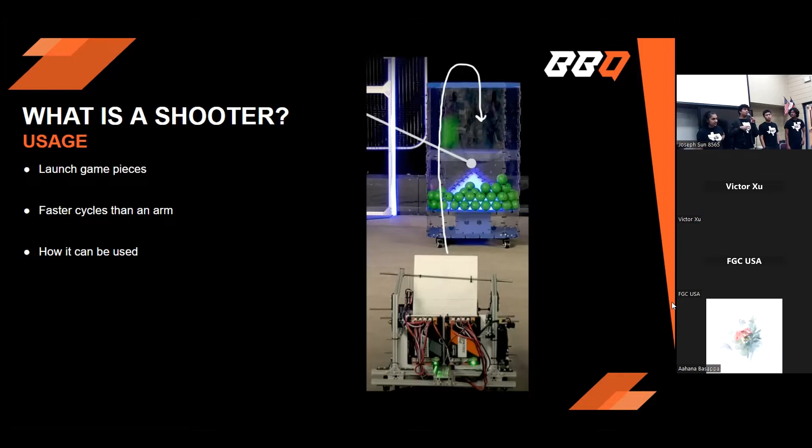Many FIRST games have been built around this subsystem, such as 2020 Infinite Recharge and 2021 Ultimate Goal for FTC and FRC, and more recently this year the 2023 FGC game, where you can use a shooter to separate the hydrogen and oxygen nodes into their separate containers.

Enter the design process. We have to remember that iteration is key to successful design. We have to factor in three things before making a design. One, how compression can change both speed and path of the cargo. Two, how different materials and wheel sizes react to the cargo. And three, how cargo reacts to each shooter differently. After factoring in all three things, we are set to make a successful design.

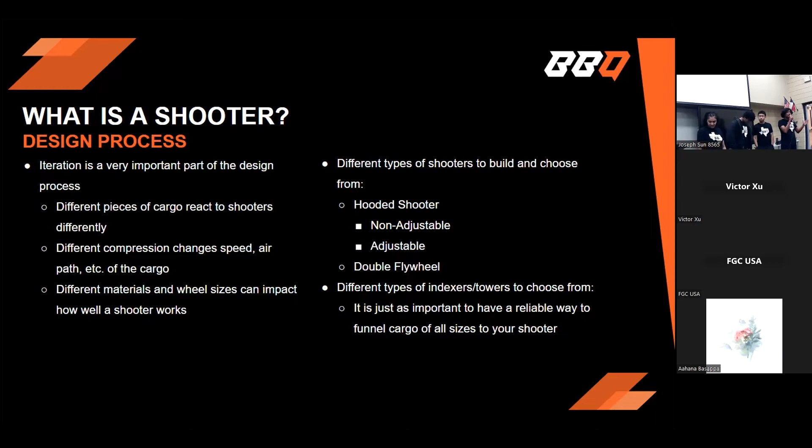Remember, it is just as important to make a successful indexer as it is to have a shooter in the first place. When we say indexer, we mean what funnels in your cargo, typically the middleman between your intake and your shooter. Next is what actually makes up a shooter. Our shooter has to be A, reliable so it won't break down mid-match, B, accurate enough to maximize points, and C, consistent so it scores every single time. Mechanically, our shooter is made up of a hood and flywheels.

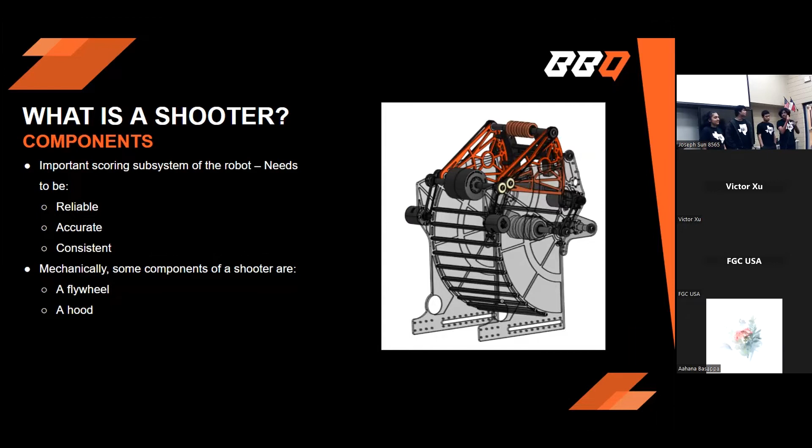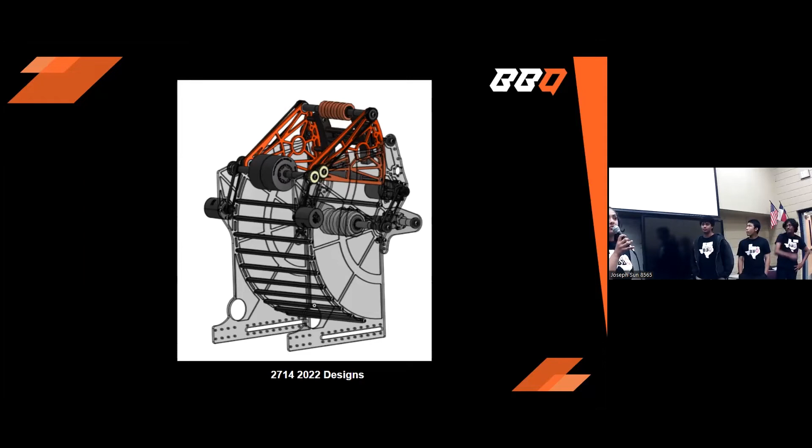Okay, great. So now that we know the design process for a shooter and the components needed to make one, let's talk about a step-by-step process of how to actually design one. These are past designs from BBQ that have been used in old FRC games like Rapid React. So let's start off with the flywheel.

The flywheel is basically what's going to be powering your shooter, what's going to be shooting your cargo. It's essentially a really simple system. You're probably going to use a heavier type wheel, larger wheels, and you can have a wheel or a set of wheels on a shaft. You always want to make sure it's spaced out in the middle, because if it's too much to the left or too much to the right, your balls will skew their path in the air.

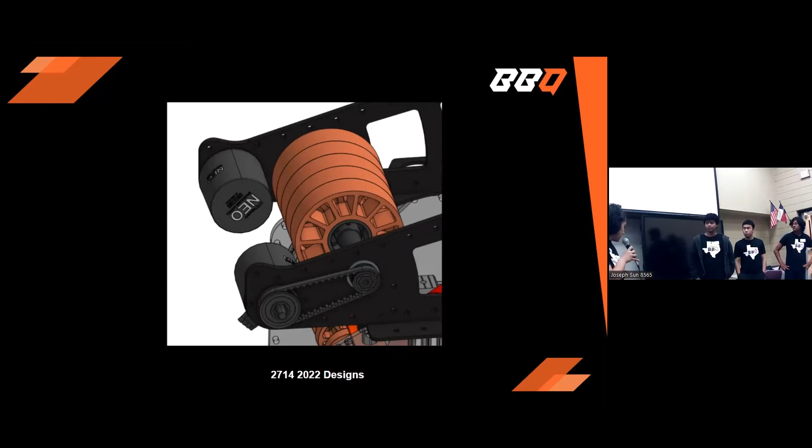Next, to power it, you're going to need 1 to 2 motors and a pulley belt system. For this gearing, you want to have the larger pulley on the motor, so that your flywheel is going to be faster rather than having more torque, because the faster your flywheel is, the better the shots you're going to get and the farther they're going to go. So next is the hood.

This is a non-adjustable hood from the Rapid React game, and these are one of the simplest hoods to make. It's essentially like a backboard for your cargo. Imagine a backboard for basketball: it helps the ball go in, but it doesn't shoot it itself. These can be made out of anything. This one was 3D printed, but you can use cardboard, metal, anything really. The most important part is that the cargo can roll up it and that it is completely stable when you're shooting, because if it moves around, your shots are not going to go to the right place.

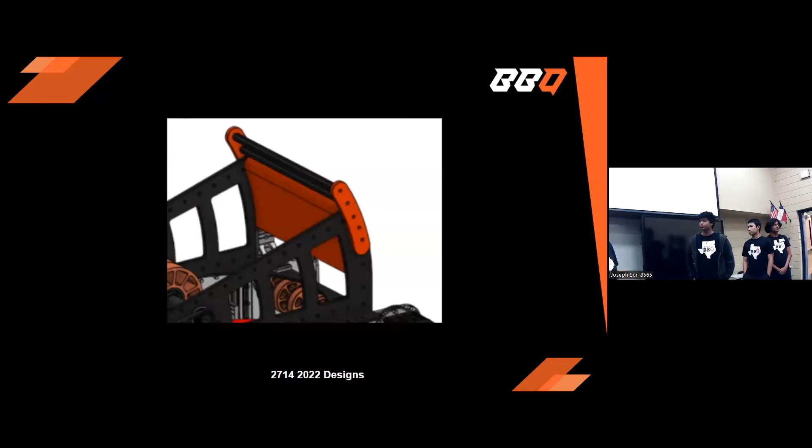There are two types of hoods: non-adjustable hoods and adjustable hoods. This non-adjustable one is the simpler one to design. And this is an adjustable hood. An adjustable hood is a little bit more difficult to design and program, but I'm going to lead you through how to design it.

Basically, you're going to need a rack and pinion. The rack is attached to the shooter hood itself, and that moves the shooter hood up and down. The pinions are on a shaft connected to the shooter structure. So when the pinions move either left or right, it's going to move the hood up and down.

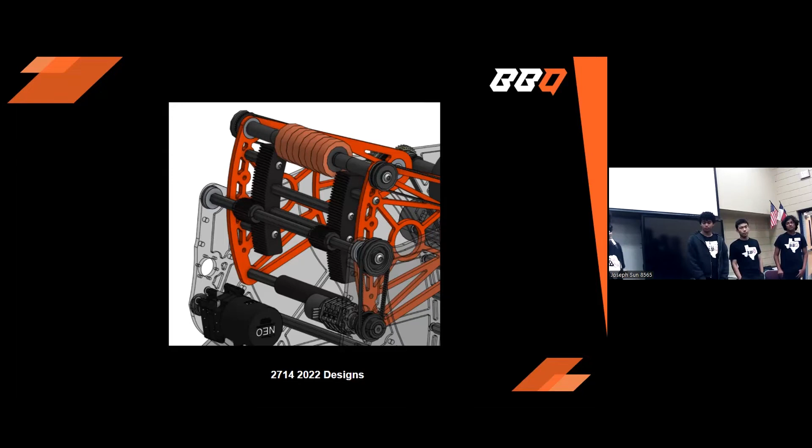To power this, you're going to need a motor and the same pulley belt system. However, for this one, you want the gearing so that the smaller pulley is on the motor rather than the larger pulley. This gives you more torque rather than more speed. When adjusting your hood, you don't need as much speed because you're probably only adjusting it a few inches each time. However, it's good to have more torque because some hoods are really heavy if they're made out of metal like this one. Okay.

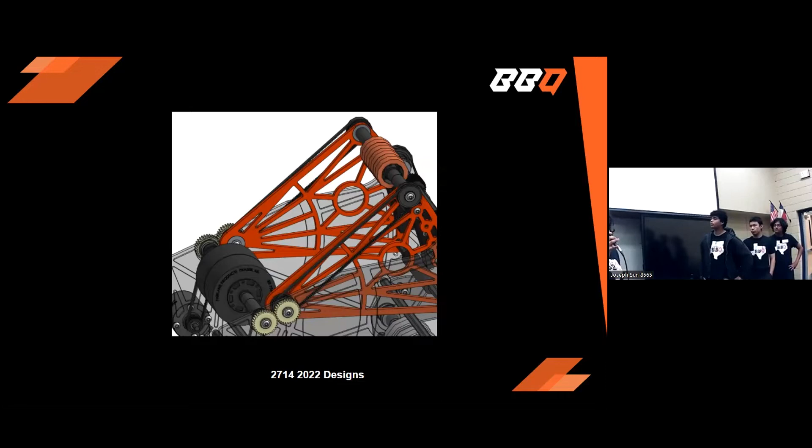Next, this is if you want to have a double flywheel. So, as you guys know, there's limited motor slots. So you can't have multiple motors for one flywheel and then multiple motors for another flywheel. So what you can do instead is you can gear them together to move at the same time. So what you can do is you can have one gear on your first flywheel and have another shaft adjacent to that with the same size gear. That makes it so that the flywheels move in opposite directions.

And then on that same second shaft, what you're going to do is you're going to have a pulley that is attached to your top flywheel. And the reason for this, instead of just doing a pulley directly from one flywheel to the other flywheel, is so that the flywheels move in opposition to each other. If they're moving the same direction, you're not actually going to be able to make your shots. You want them to be moving in opposite directions to either intake cargo or exit cargo.

So, next we're gonna compare the differences between these types of shooters so you guys can see which one will be best for you and your team, depending on the game that you use.

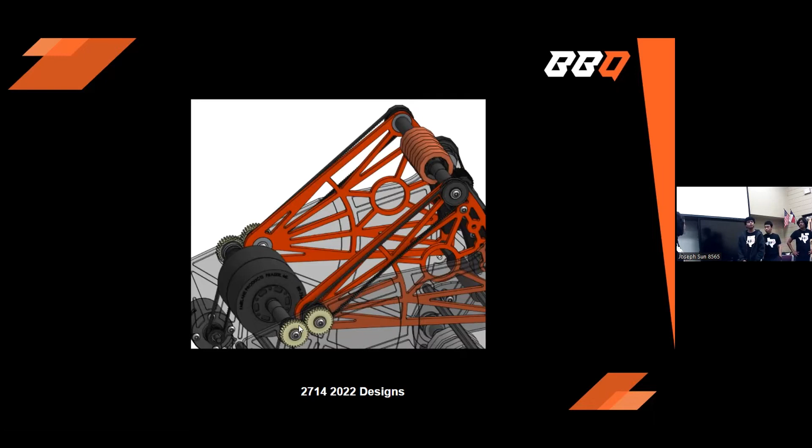So, okay, it works again.

Okay, so this is a non-adjustable hood shooter. So as I said before, it's one of the easiest to design and build. You really don't need to do much for programming as well. So this makes it easy for first-time teams who've never done a shooter before. However, it can only shoot a limited amount of heights from a limited amount of places because you can't adjust the hood as much, but it still gives you a little bit of range with what you're working with.

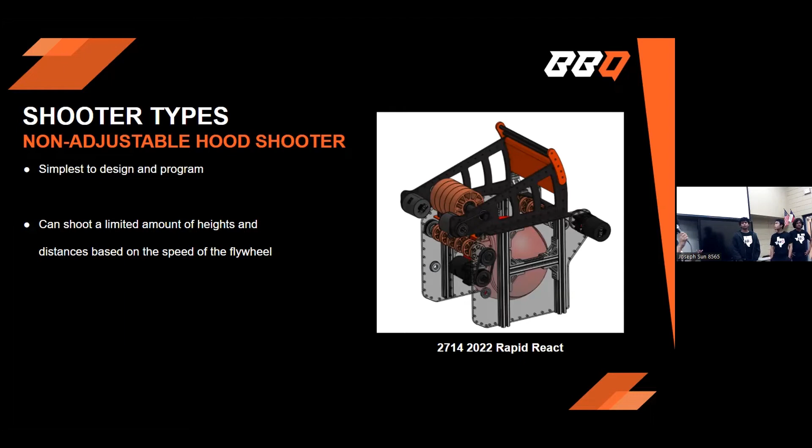Next is the adjustable hood shooter. So this one, it has a very large range of motion. You can shoot from a lot of places on the field at a lot of different heights. However, it's high risk, high reward. So the software and design is going to be a lot more complicated than just a non-adjustable hood. However, you're going to be able to shoot from practically everywhere on the field to practically anywhere you want to go. So let's say you're an experienced team, you've done shooters before, this would probably be the route to go for you.

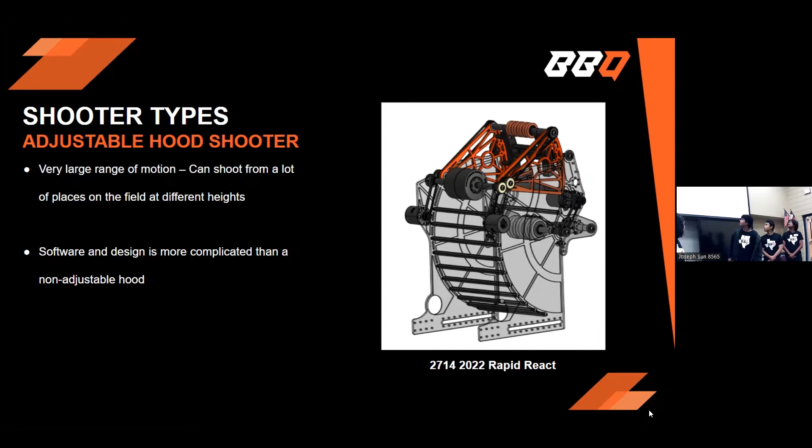Yeah, so the last shooter we're going to talk about is the double flywheel. The double flywheel shooter is unique in the fact that it can be used on both a non-adjustable and an adjustable hood, which makes it very open for teams to mix and play around with which way they want to score. This double flywheel is also special in the fact that you can add more speed or velocity to your shots, creating more and more cycles.

And it allows you to flatten the arc of your shot, allowing you to hit more straight shots when you score. It has a lot of scoring potential, and a lot of teams use it to get higher cycles, but it is harder to do. Again, it is another high risk, high reward thing to build.

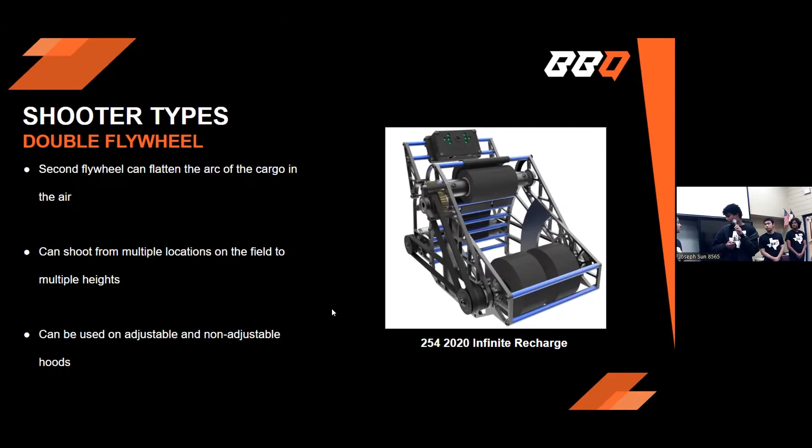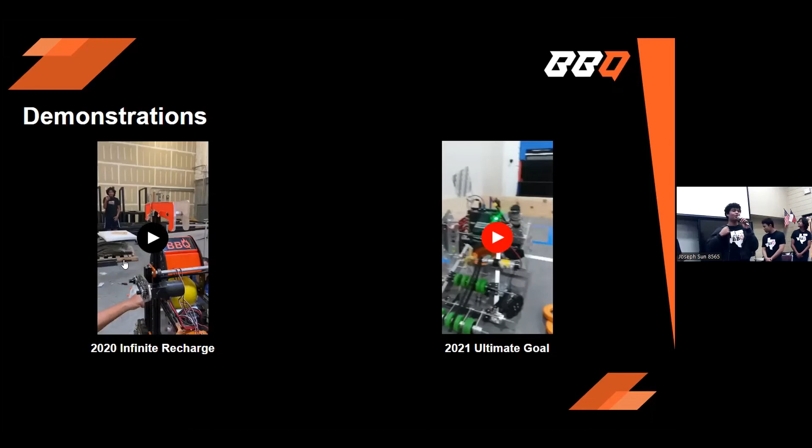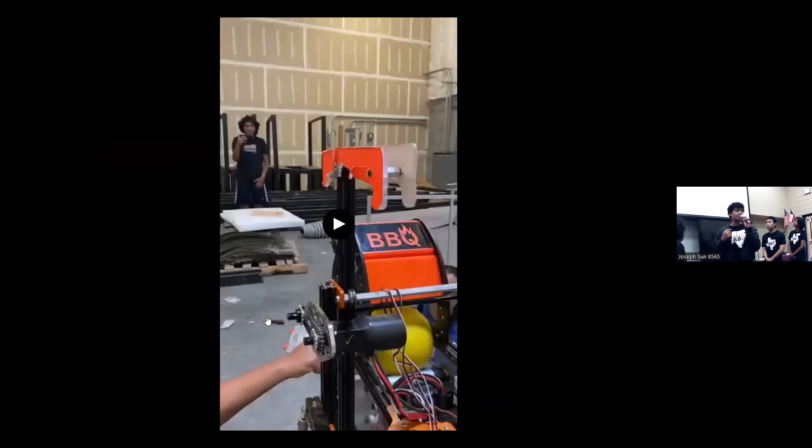All right, so we're going to show off a couple of demonstrations real quick. So the first video I'm going to play is our team's 2020 Infinite Recharge robot, where we use a single flywheel and a non-adjustable hood. As you can see, it goes in a single arc, allowing you to be very consistent with your shots from a certain distance.

Can you hit escape? Wait, let me do that.

All right, and our second robot that we're going to show is the 2021 Ultimate Goal robot that our team built, which is a double flywheel shooter and uses a non-adjustable hood.

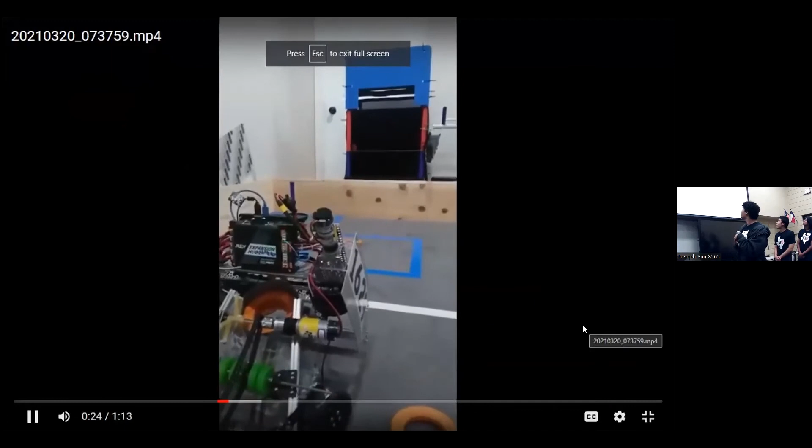Alright, so now we're gonna move on to the software portion of our shooter. So let's imagine a dual flywheel shooter that hits its target dead center every single time. So you might be asking, what's the secret? The secret is PID control. So PID, which stands for proportional, integral, and derivative, is a smart way to control the system. So for our shooter, this means making the flywheel spin at the right speed for an accurate shot.

So let's look into these values a little bit more. The P value, which stands for proportional, measures the difference between the desired speed and the actual speed. We then use this difference to change the power of the motors. If the difference is big, we make a big change. If the difference is small, we make a small change. So sometimes there might be a little error that keeps adding up over time.

The integral value looks to fix that. The integral value looks at the error built up and corrects it. The D value stands for derivative and looks at how fast the error is changing. This helps us slow down and prevent overshooting.

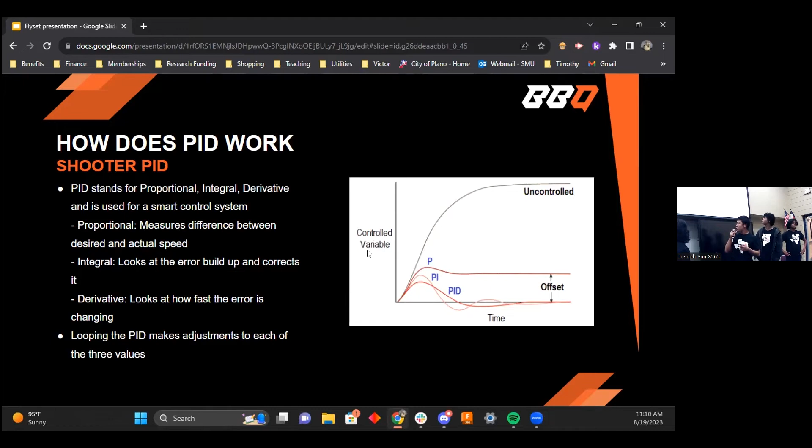So you might be wondering, why does PID matter? PID matters because it adapts. It's like having a sharpshooter that can adjust the speed and distance on the fly. So with PID, we're able to land an accurate shot every single time. So in a nutshell, PID basically makes our shooter super accurate, and it's like having a robotics marksman that never misses. So let's embrace the power of PID and watch our shooters amaze us with skill and precision.

All right, so imagine this, a shooter that always hits its target every time. That's what every single team wants, but how can we actually do that? We can do that by using a simple projectile motion formula. Using the projectile motion formula, we can get the horizontal and vertical distance values. That's what we're looking for.

So using the first formula, which is d = v² · sin(2θ) / g, we can get the distance. And to get the launch angle, we can use θ = ½ · sin⁻¹(g · d / v²). So what do these variables actually mean? D is obviously for distance, theta is your launch angle, v is velocity, and g is the force of gravity.

So what do these formulas actually help us with? So let's say we're using a non-adjustable shooter. We're going to be shooting from a set angle. That's going to be our theta. So now that we have our theta, we have to know where on the map or what exact distance we can shoot from. We can use the distance formula for that. That's what we did for our 2020 and 2021 robots, which had a non-adjustable hood, allowing us to hit consistent shots at the target every single time.

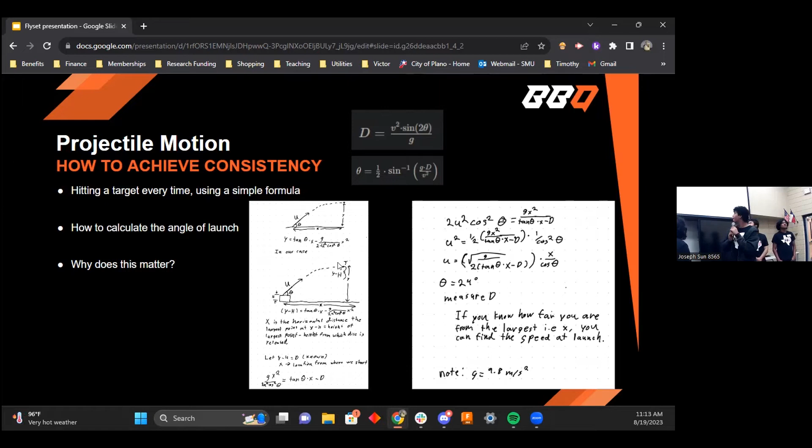Through this, we can achieve consistency in all of our shots, increasing our scores per cycle, and overall having a better and more effective shooter. That was our presentation. Thank you for listening.

Question: about what RPM are y'all applying this? I know it's variable, but what's kind of the range? So for the FRC robot, we're not using any gearboxes on our Neo motor. It's a brushless motor. If you go on the Rev website, you can see all the stats for the Neo motor. So that's the RPM that we use, and then we geared it up with a 16-tooth pulley and a 32-tooth pulley.

But for the FTC bot, we used a gearbox on that. I think it was like a 25-to-1 gearbox, making our RPM like 450 something. Because we were shooting from real close and we didn't want to overshoot, that's why we were aiming for slower. Thank you.

You mentioned flatter trajectories as a result of the dual thing. Is that because of the spin incurred on the ball? So the two spin forces act on the ball, kind of like when you shoot a basketball, right? You have the curve going backward, allowing it to stay in the same position in the air. And you can increase the spin on both, allowing you to do a straight shot and have less curve.